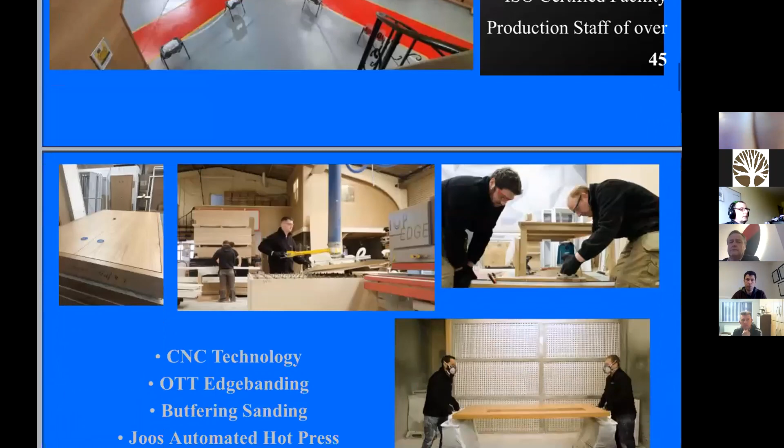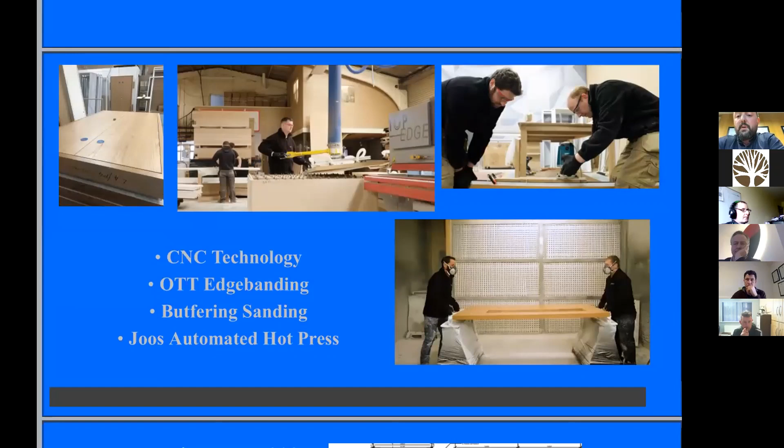The next slide shows a few shots of the guys working through the processes. On the left hand side you'll see some of the pre-hung fire door kits we supply into the market at the moment - a very popular product because we can offer full certification. The doors come pre-hung, with all ironmongery pre-installed as per the fire certification. It cuts down a lot on site installation time, and means that, particularly now with BCAR and various other developments, you have a fully certified product that's going to tick the boxes from the fire point of view.

The next slide is in relation to the factory itself and where we see ourselves going. We have planning permission at the moment and we're in the process of developing and extending our facility. From the drawing, the shaded area is the new extension we're going to implement - just over 6,000 square meters. We'll have boots on the ground getting that moving, hopefully prior to Christmas, and we hope there'll be a quick enough turnaround that by springtime we should have the facility up and running, with a lot of new machinery going in there.

This is really focused around our acoustic business, which has developed at great speed over the last 5 or 6 years, and we just have to make the next steps in terms of development and what we can supply into the market. Some of the items we'll be putting in include a high-speed finishing line, a new dedicated spray booth, along with a bespoke CNC line we're currently developing, and double-sided sanders. We're also implementing a dedicated R&D area within that facility, with a team headed up by myself, to have that constant development of acoustics and acoustic products, and plant seeds we can bring to market in years to come.

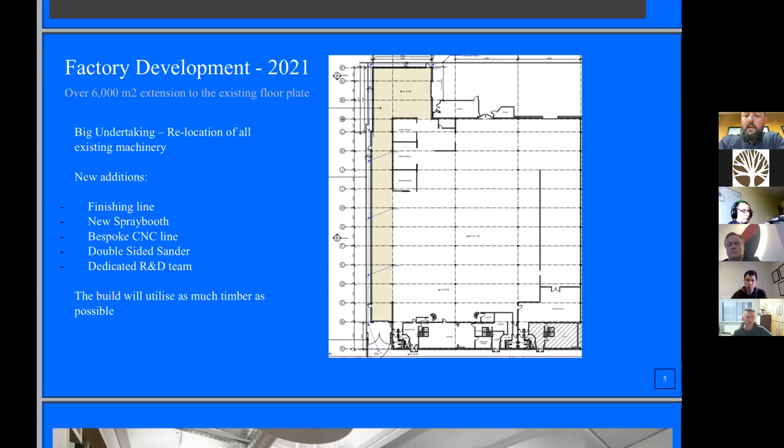In terms of Burke Joinery, there are 3 pillars to what we do and what we invest a lot of time in: design, manufacture, and installation. When we go to market, we're dealing with a lot of tier 1 contractors, the likes of John Sisk, BAM, Collen Construction, and so on. What we offer them is that full service package, taking on the design piece from the CAD drawings and various detailing required.

Within that there's the consultation piece, which is very important when it comes to fire requirements or acoustic requirements. The manufacturing piece speaks for itself - we were always traditionally a supply only business, but in recent years we've developed that further, so manufacturing has always been there. The last piece is installation. In recent years we've taken steps to ensure we have that full 360, that everything is installed properly, in our own control, so we can manage the quality to ensure everything is installed as it should be.

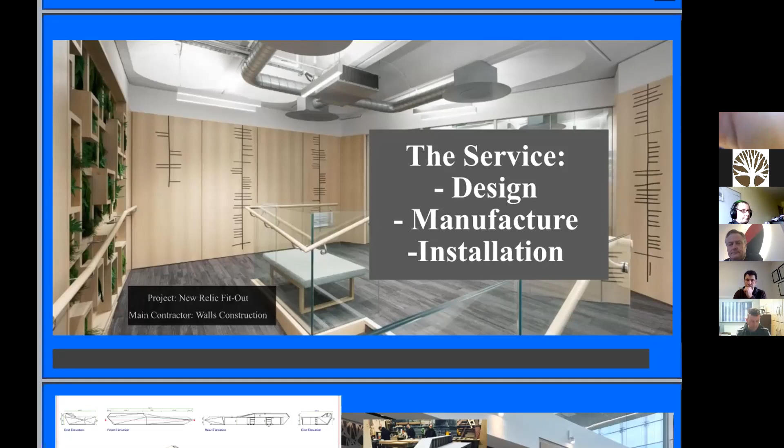Here's an example of some recent work - that image shows the detail our guys go to in design. That was a very specialist one-off piece, a reception desk we did recently out in One South County for Collen Construction. It took a number of months in development and design, and then a number of months in manufacture. The final finished product had a Dekton finish, which was extremely challenging - it wasn't a material that naturally lends itself to the different shapes and forms you see in the images. But it gives a good example of the level of detail from design right through to the elaborate skill required from the joiners in the factory, and then the final installation on site.

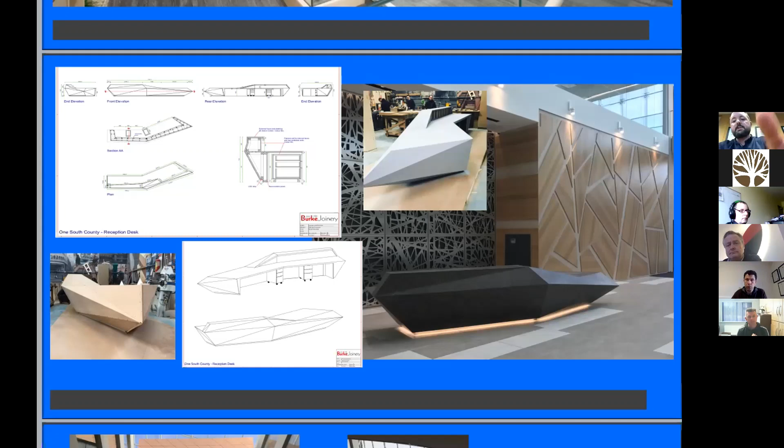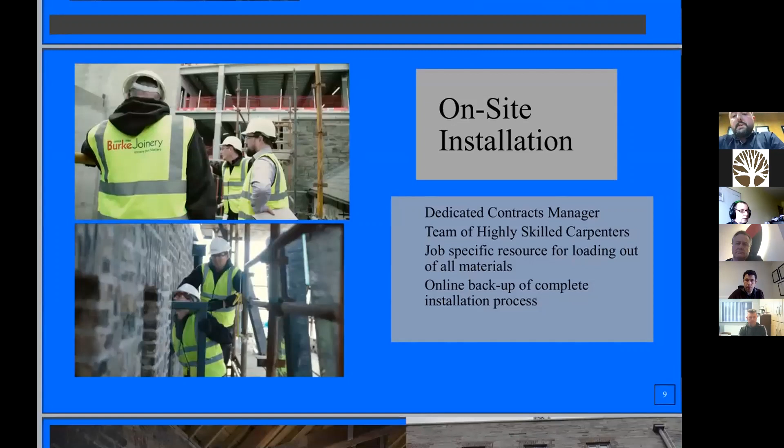The next slide ties in with on-site installation - that's actually some live shots of a project we're on at the moment. We just recently handed over the old Boland's Mill, part of the Boland's Quay development. It was a very interesting project where we had over 450 old style casement and sash windows that we had to replicate as best we could from the original design found in the building. We were literally handed an old window, crumbled and fallen apart in the coffin box, and asked could we take that and develop it, bring it into modern day standards. It was quite a challenge.

It involved a lot of work in the UK with BM Trada, a lot of testing. As they said back then, windows were just used as a mechanism to let in light, and that was pretty much it. So we had to make sure it was watertight, and could pass all the various air permeability and other requirements you'd have now from the modern day standard. That involved a number of months - I think about 6 months in development just to get it to a stage where we could start the manufacturing process. Each window was individually measured, detailed, and installed to suit the specific opes. So it was quite a challenging but rewarding project, as they say.

But that gives a good example of the traditional aspect and the traditional joinery piece that we've always had, going back to the first slides of my father when he first started out installing windows in houses in Ballyfermot back in 1982. We still have that skill set, and it's being brought through today. It's good to see.

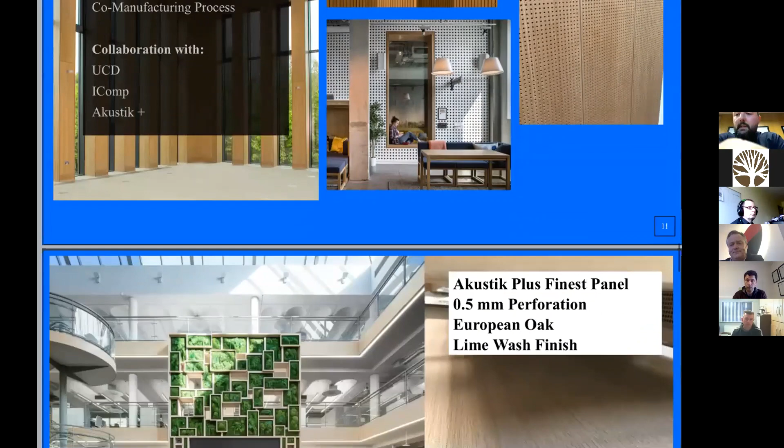The next few slides show some examples of that work. There was a project we did recently, New Relic's Dublin headquarters. You can see the micro perforated panels we worked on with Akustik Plus, which were supplied to us. We had to put a bespoke lime wash finish on them, and you see them installed in the atrium there.

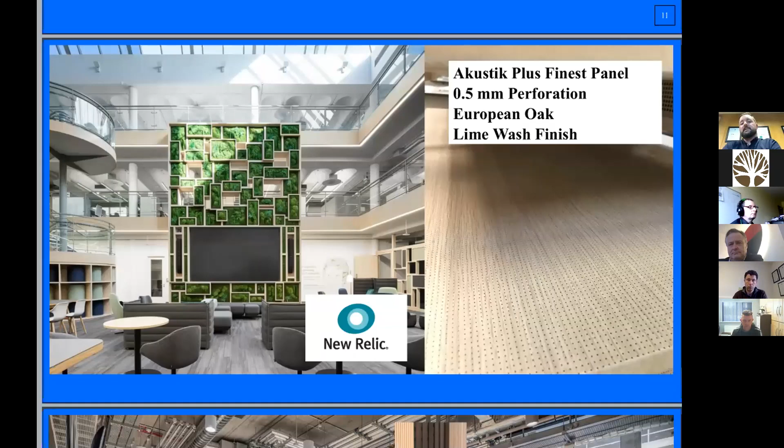We also had that unbelievable bespoke AV wall, a piece of art I suppose you'd call it, with the moss panels. Again, showing the wide range of skills we have when combining acoustics and joinery within our manufacturing plant.

Another example is one out in WeWork here in Dublin, where we combined solid slatted timbers that we had to stain and match through, while the guys in Akustik Plus supplied us with the perforated acoustic boards. There was a lot of bespoke testing on that to ensure we achieved the various acoustic ratings required in the different areas.

The last piece is another example. These pictures delve into the bones of the work the guys would do. This was One South County for Collen Construction. A lot of very fine acoustic work - you're seeing a very unique piece of joinery where we had to combine an unusual aesthetic while also achieving the high performance sound absorption required in the space.

There was that balancing act that the guys had to maintain throughout. You can see from the veneers they used a kind of stripped veneer to give it a more natural look, like solid timber. And then you can see it in its final installation.

It was quite impressive, and that project was a great showcase for us as a business, because it combined all our business entities into one job - the fire doors, the acoustics, every joinery element within the project was handled by ourselves, one single source from design and manufacture right through to installation. It was a great showcase of the various skills we have within the business and what we can do.

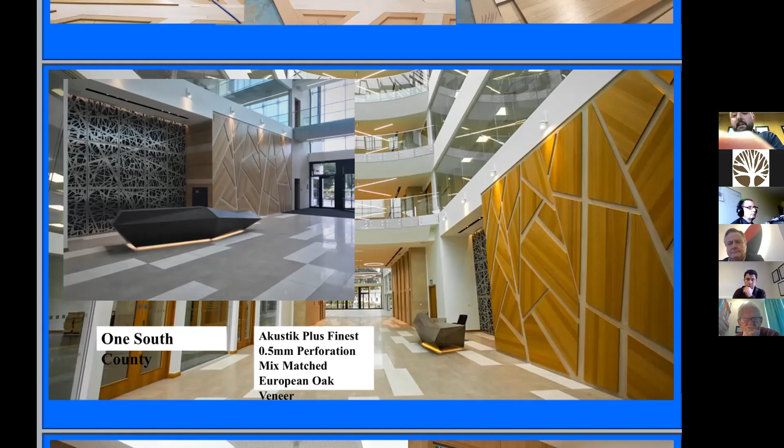Again, another recent example with the acoustic panels out in University of Limerick's Glucksman Library - some really high performing acoustic panels required in the library spaces.

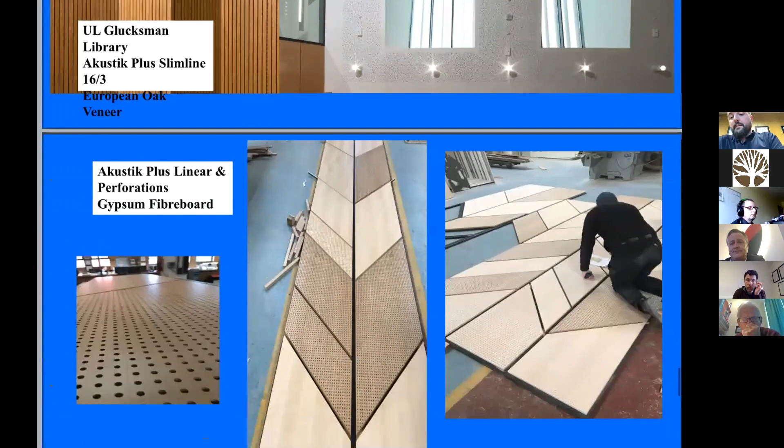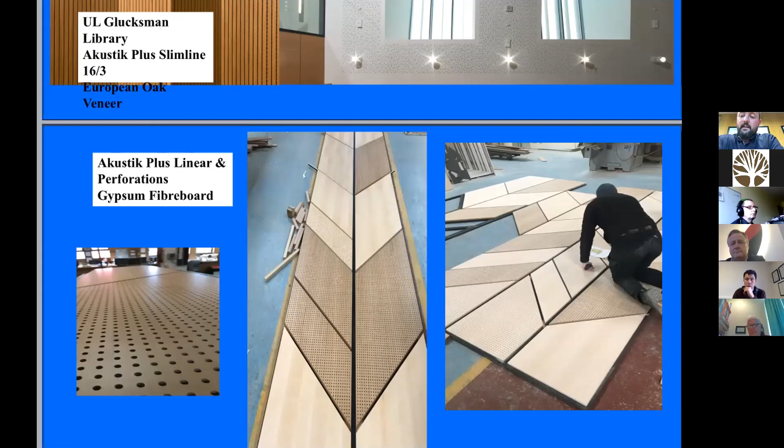Another shot of really fine detailed acoustic work for a ceiling panel feature, a herringbone effect. That was a good example of the co-manufacturing process and the collaboration we have with the guys in Akustik Plus. Very detailed work, and also very detailed in terms of the various reflective and sound absorption properties from the different materials we had to combine.

The Burke fire door entity has moved and gained a lot of traction over the last 18 months. Traditionally within the industry, when you'd sell a fire door, it was a single transaction - you're paid for the door, it's installed, and after the 12-month defect period it's gone into the hands of some form of facility management, and that's it. You don't forget about it, but it's in their care.

We've seen that there's something in the market where, in Ireland, people have missed the trick on this - a fire door is not just that transaction, it's something that has to be maintained for its full life cycle. So we've tagged on that service piece: all our doors go out with a QR code. Every single fire door is tagged, allowing the end client or facility management company to contact us directly for inspections, maintenance, or whatever's required, to ensure the doors are compliant for their full life cycle.